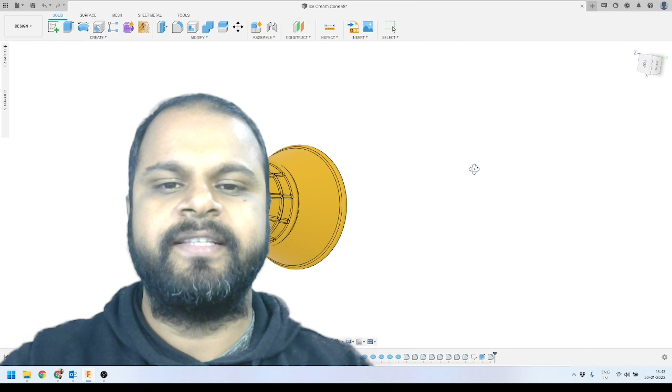In this video I'm going to explain how we can 3D model this ice cream cone. Right on your screen here you can see this is the ice cream cone that we are going to start modeling in this video.

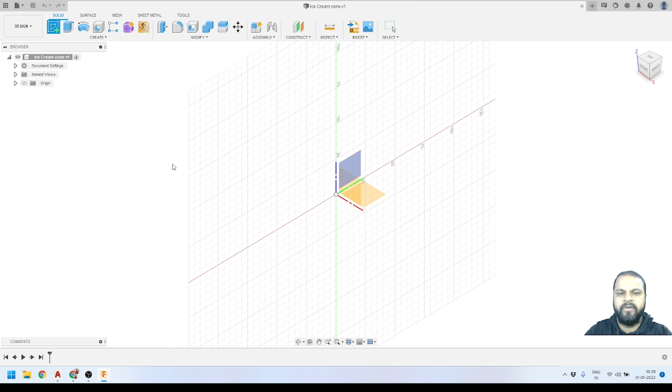We'll start with a sketch first. The first thing we'll do is click on this create a sketch tool from here, then select the front plane. My approach is going to be: I will create half of the cone, then revolve that by 360-degree angle. So this is going to be my approach.

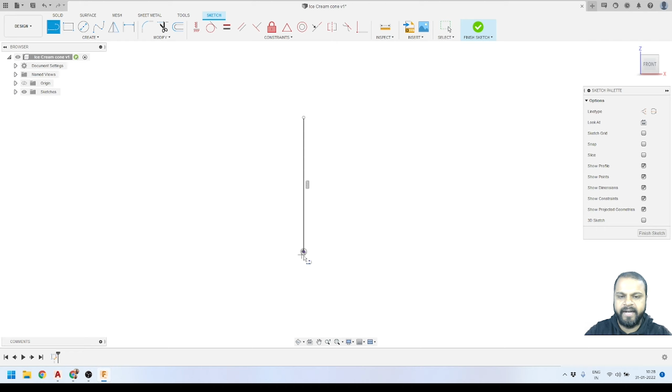I will first create a vertical line like this, and drag it like this. Next I will create a line like this, then another line like this, and this. So here I am simply creating lines and connecting those lines.

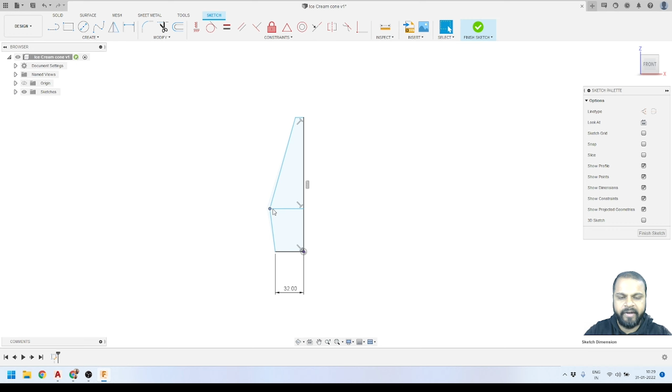The next thing I will do is put a few dimensions here. This one I want to keep at 32 millimeters, and I will drag it little towards inward. Then I will give a few more dimensions like this one, I want to keep this as 32 as well, and then from here to the top, I want to keep this as 95 millimeters.

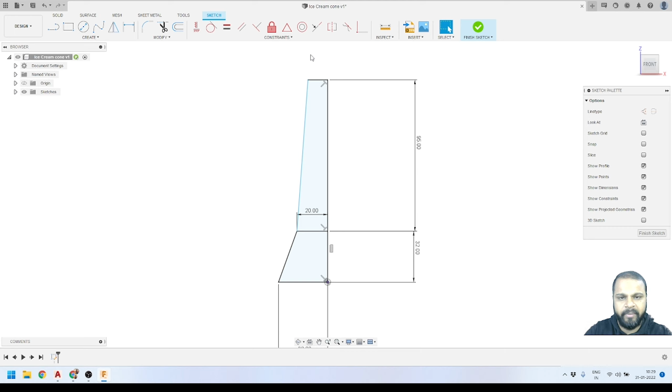This collar we want to keep at 40 millimeters, so I will write 20 millimeters since I'm taking the half of the 40 millimeters, and here we want to keep this one as 5 millimeters. We'll activate our dimension tool, select the line, drag it outside, and write 5 and enter.

Here you can see our half ice cream cone shape is done. I can click on finish sketch from here, and here we got our closed profile. These are the two closed profiles we got.

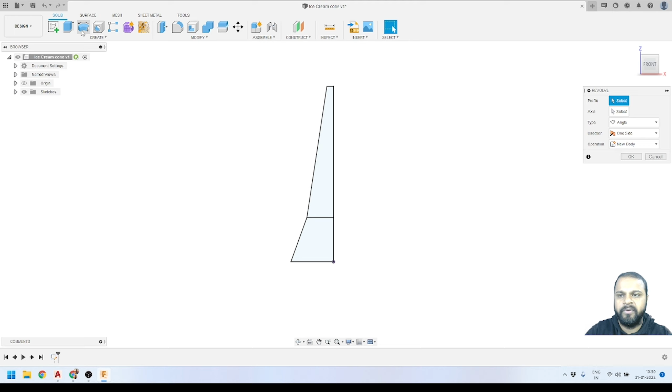I can use my revolve tool from here, select the profiles, and select the axis, and here we are getting the preview of our ice cream cone. The angle is 360-degrees, that's right, and I will just press OK.

One more thing I would like to tell you: when I started modeling this, I had not started with the component, and the reason is that this ice cream cone has just a single body, so there is no need to start with the component. You can simply start sketching this thing, because the component approach is only needed where we have multiple parts and we want to create assemblies with that. So in that case we need the component approach.

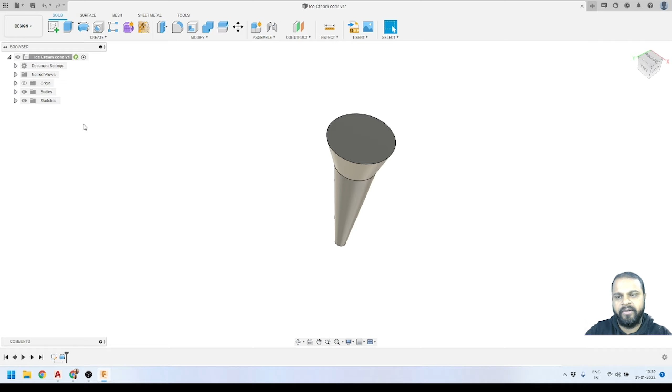Either you can go with the component approach or the single body approach that we are following right now, without using the component approach. So this is the ice cream shape we got, and the next thing is we are going to apply a few fillets on the bottom of this one. I will apply a fillet of 3 millimeters like this.

So we'll press OK. Here you can see this is what we got.

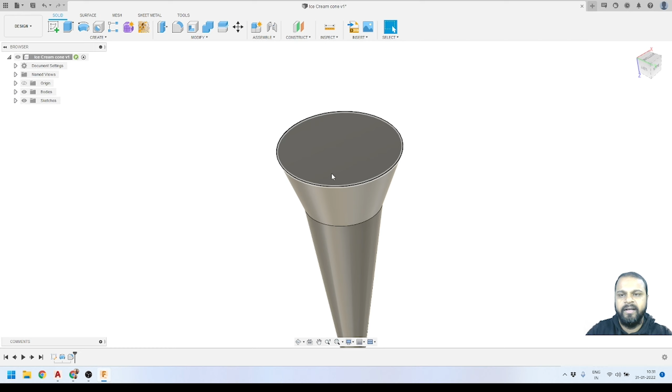Before moving forward, I'd like to apply a shell over here. I'll activate my shell tool, select this face, and provide a shell thickness of 2 millimeters, then press OK. Here's the preview we're getting, so it's looking like an ice cream cone, right? It looks like an ice cream cone, but we have to add lots more features to this.

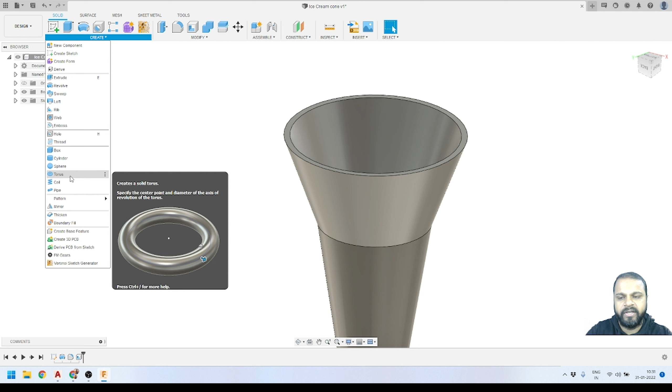To do that, we'll go to the create panel, then to the torus tool. We're going to create multiple toruses at different locations to make it look better. I'll activate the torus tool, select this front plane as a sketch plane, select the origin, and then specify the torus diameter.

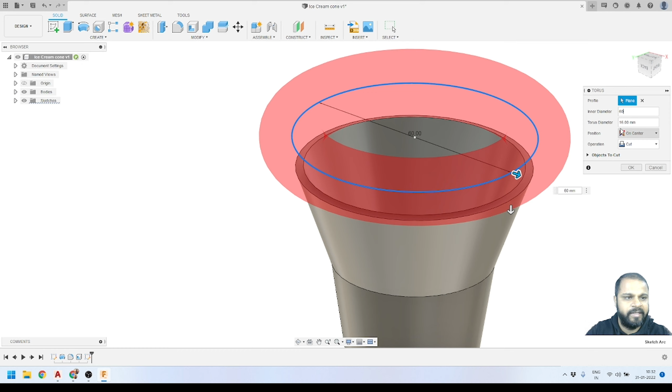This is the torus inner diameter, and I'll give it a diameter of 60 millimeters, and the torus diameter we want to keep is just 6 millimeters. We'll see in the back view how it's looking, and it looks something like this.

I think we have to increase this to 62 or something, and instead of cut I want to keep it as a join. Here you can see the preview we're getting.

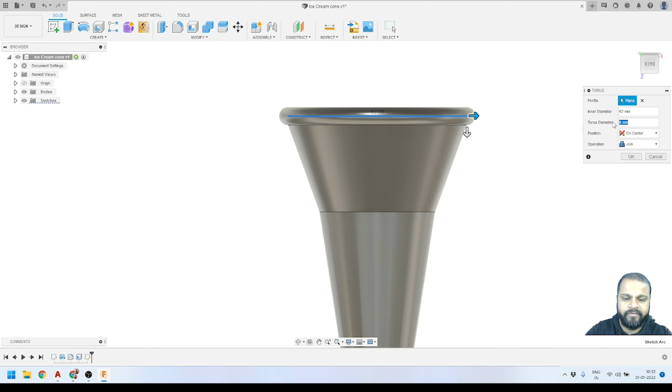I think the 6 is a little bit higher, so I'll decrease that to 5 and see how it looks now. This is how it's looking for now, and I think 62 will work, so we'll keep 62 and press OK.

Here you can see this is what we got. And if I expand the body, since I had kept the operation in the torus as join, it's still a single body since this part has been joined with the ice cream cone.

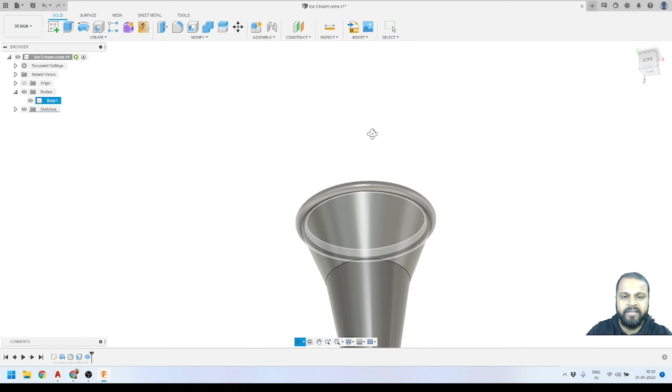The next torus we have to create is on this collar here. For that, first I have to create a plane at that location. If you remember the first sketch, the distance of this collar was 32 millimeters from the origin.

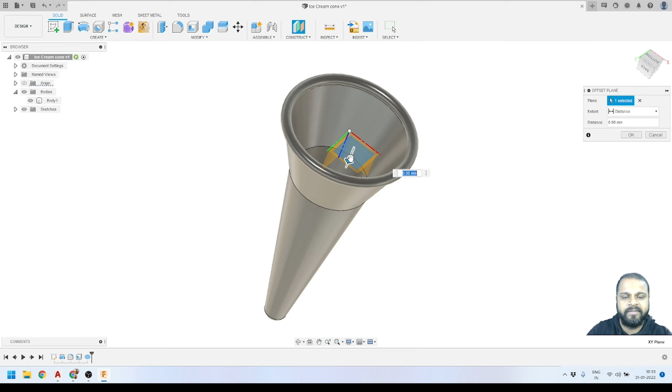I'll click finish the sketch here, then go to the plane tool, select the origin, this bottom plane, then go to the back view to see the location of the plane and write 32. Here you can see I'm getting a plane at this collar location, so I'll press OK, and here we got the plane.

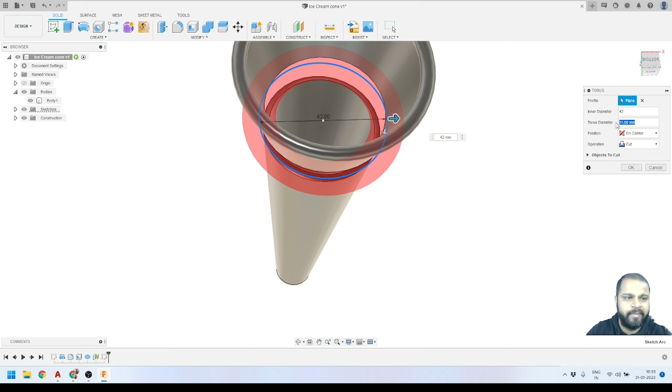Now I'll go to the create panel and repeat our torus tool. We'll select that plane, then the origin, drag it outside like this, and this time we want to keep this at 42 millimeters, and the torus diameter we want is 4 millimeters. I think that will be enough.

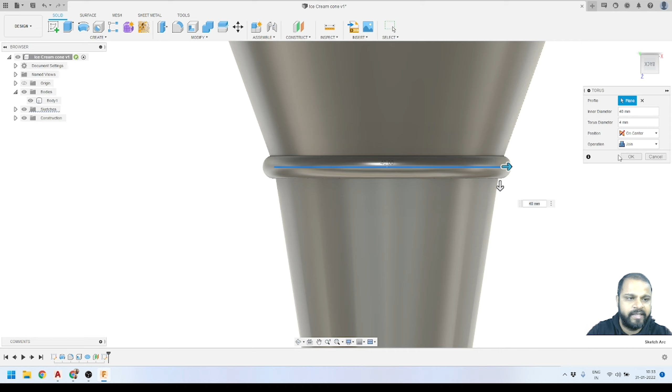We'll keep this as a join, and see the preview if we need to decrease the diameters. We had to decrease this inner diameter to 40. I think 40 will work, and we'll check inside if it's getting inside. No, it's not getting inside, so 40 is working in our case. The operation we're also going to keep as a join, so we'll press OK.

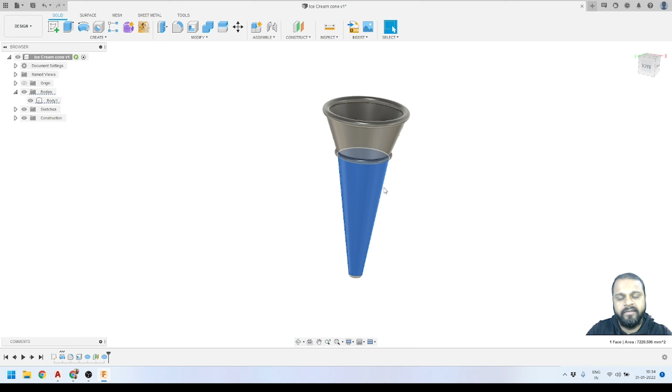You can see this is what we got. And the next thing is we have to create multiple toruses on this face. Before that, we want it to look like an ice cream cone with a patterned, textured face on this surface. This is what we're trying to achieve.

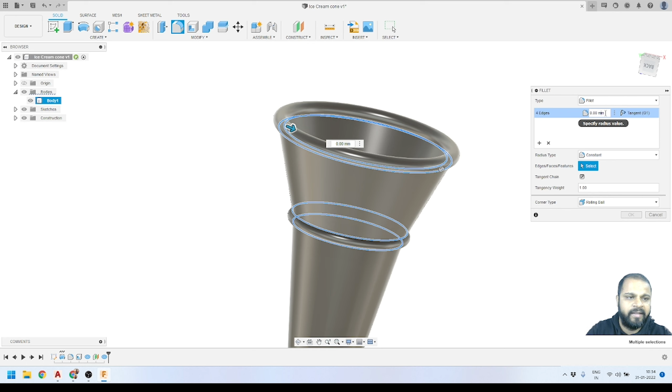For that, I'll apply a few fillets here before moving forward. We'll activate our fillet tool and select the edges where I want to apply the fillet. These are the corners where I want to apply my fillets - I selected all the corners, the inner corner, outer corner, and these two corners. Then I'll apply a fillet of 2 millimeters, or maybe 3 millimeters will work.

3 is good, I think that will give me a smooth kind of finish, and also make a good angle for 3D printing. It's nice, so I'll just press OK.

There you can see we had applied the fillet. Now we'll move forward to our next task.

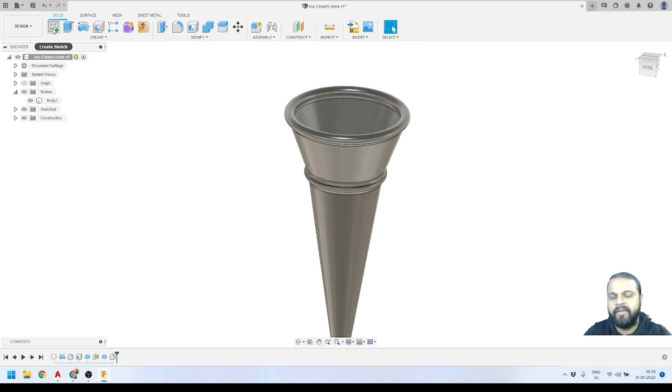We'll activate our create sketch tool from here, and select this front panel as the front plane for our sketch plane. So here we are, in the front plane now, and we'll start creating that texture on this face.

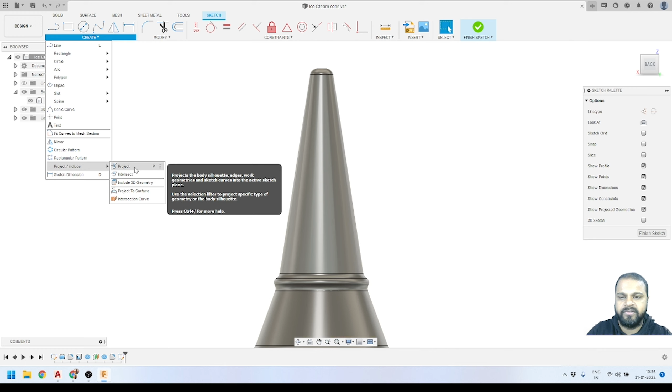We'll start by projecting the lines first. I'll activate the project tool from here, or use the shortcut key P. I had activated the project tool, and I'll select this line as a project line, and this line as a project line, and press OK.

You can see I got the end origin for both the lines. Next, we'll create a line like this from this point to this point. Then I'll click on finish sketch, and go on to the create panel, and this time I'm going to use the pipe tool.

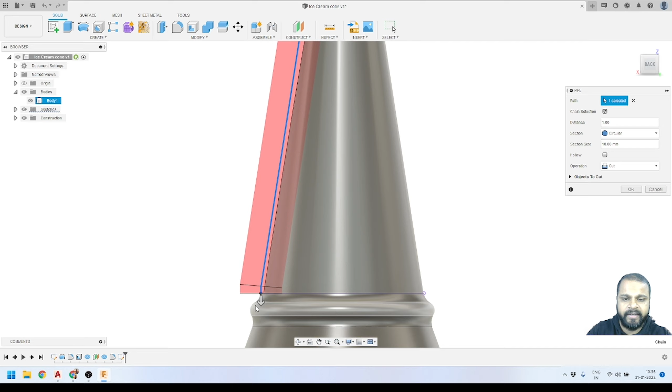We'll activate the pipe tool and select this one to create a pipe kind of shape. Here you can see we are getting a cut, but that is not needed. First I will specify the section size, keeping it at 1.6 millimeters, and here we want to keep it as a join.

Here you can see the preview we are getting. I will check on the top as well, to see if we are doing it right or wrong.

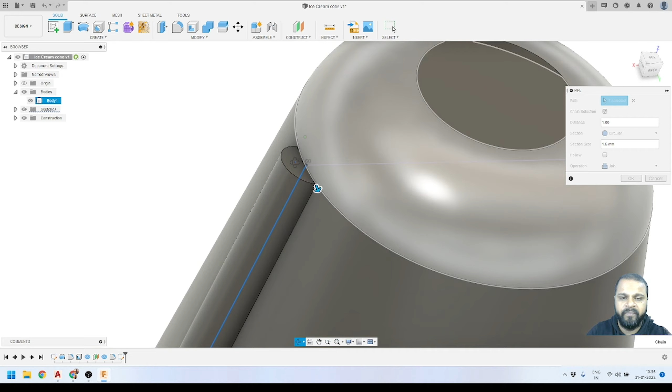Okay, so here's one more thing - I think we had to press Ctrl Z and go back to our sketch to modify it a little bit. We don't want to touch this line to the very end of this point; I just want to keep it a little bit earlier than that point. So I will select the line, press delete, and create a new line.

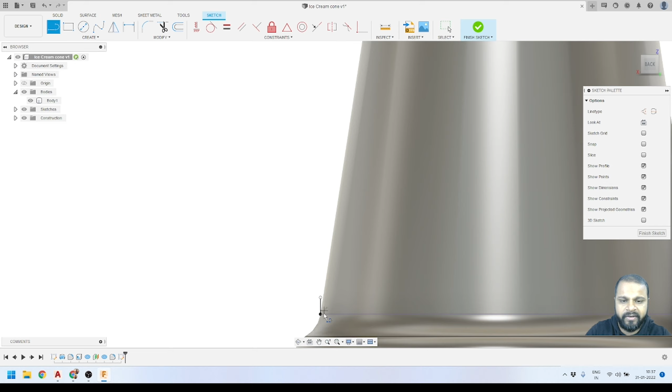This time I will not create a line touching the point. I will just create a line a little bit earlier to both points on both directions like this. Then I will create one more line like this connecting to this point, and on the other end I'll do the same.

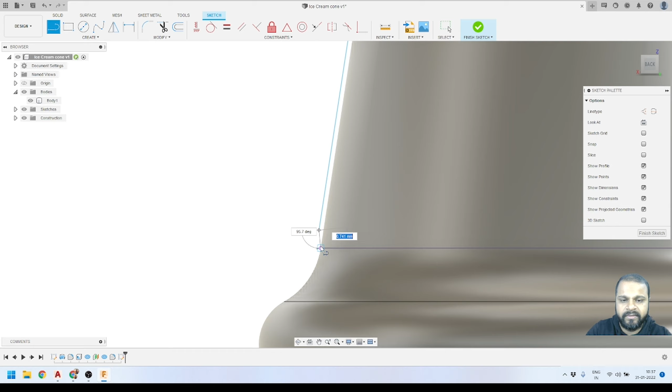I'll tell you why I'm doing this. I will make sure all three lines are in a collinear position, so I'll select the lines to make them collinear. Here you can see the lines are collinear now, and I'll also make sure these two lines are collinear - here they are, collinear now, and they are different lines.

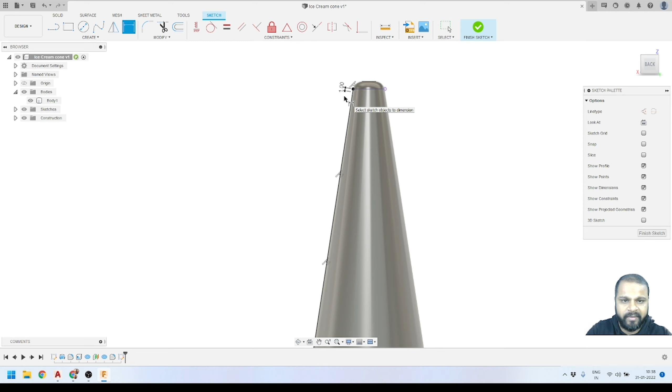So I will specify the dimensions. This small piece I want to be 1 millimeter, so I provided 1 millimeter, and I will select that particular piece and convert it to a construction line. I will do the same on the bottom face for the small piece - I also want to make this 1 millimeter and convert it to a construction line.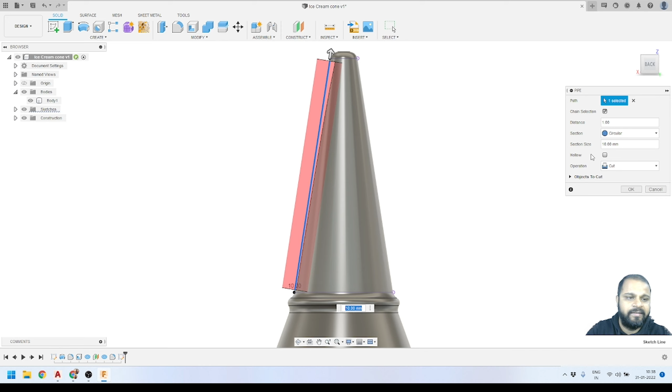Now I can click on finish sketch happily, and move on to our create tool, using the pipe tool again. We'll select the thing, provide the diameter of 1.6 millimeter, and make it a cut. Here you can see this is what we are getting, and we'll press OK.

Here you can see this is what we got. The only thing we have to apply now is fillets on these two edges over here - these are the two edges we want to apply fillets to. So I selected the two edges and will apply a fillet of 0.8 millimeter.

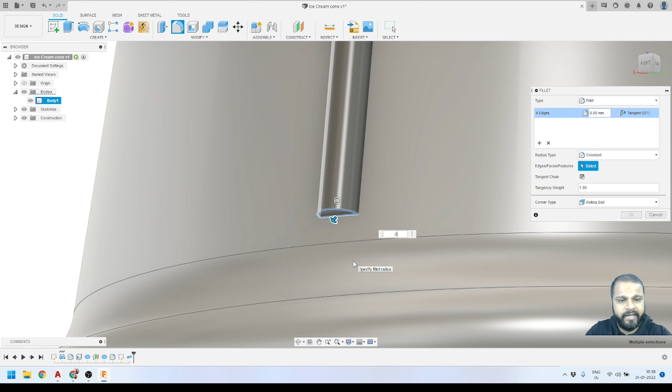I think that is going to work. If it's not working, we can decrease it to 0.7, 0.5, or 0.4. Nothing is working, so again we'll select only these two corners and apply the fillets. Sometimes things just won't work, but the 0.8 is working, so we'll leave it like this for now.

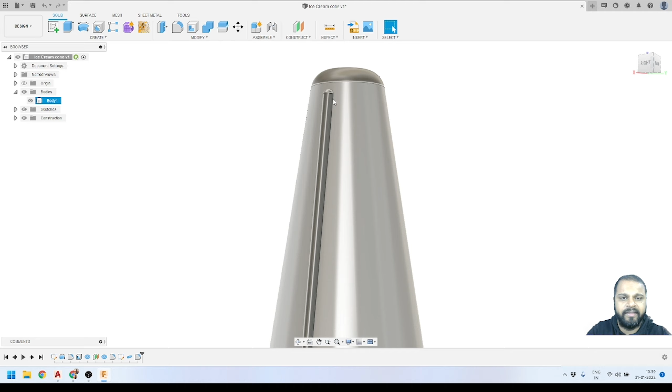Here you can see this is what we got, and I will select these two features from here by pressing shift on my keyboard, and then go to the create panel here.

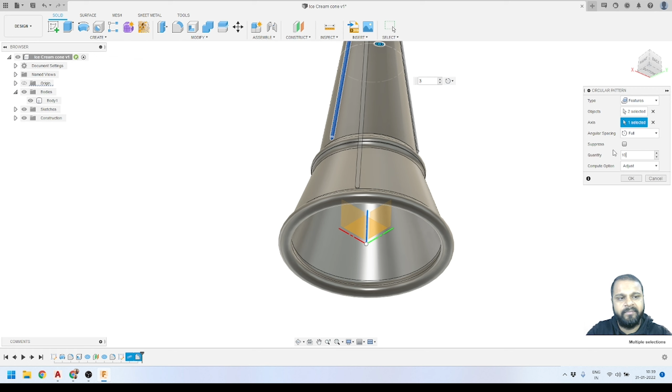Then I will go to the pattern and use this circular pattern tool, and I will select the axis - this blue axis, this vertical axis. I will provide the quantity as 10, so we want this patterned 10 times around the axis, and press OK. So you can see this is the shape we got.

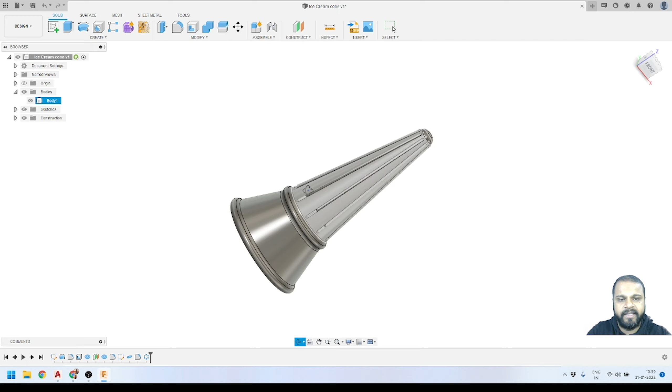I think it's looking good now. It's also not touching the end, which is very good, because if it touches we'll start getting lots of issues. So that's very nice. Next we have to start making toruses on vertical positions to make a rectangular kind of pattern on all these faces.

There will be lots of repetitive tasks, so we'll move this video a little faster to give you an overview. We'll first start with creating a plane. I'll activate the tool, turn on my plane, select the plane, and offset it towards the vertical position by 10 millimeters like this. Then I will repeat the process, selecting the plane and giving it an offset of 10 millimeters, keeping lots of planes like this.

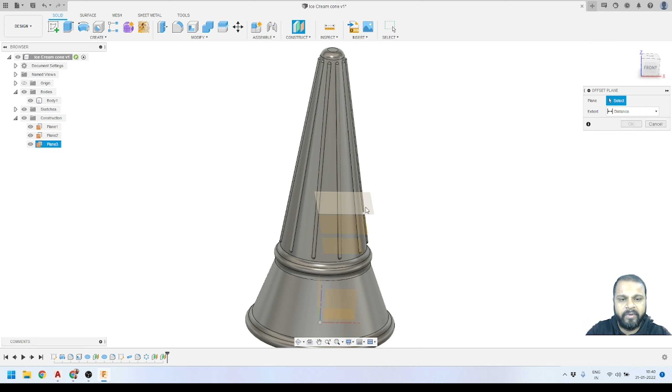Here you can see we had created multiple planes - maybe 9 or 10 planes.

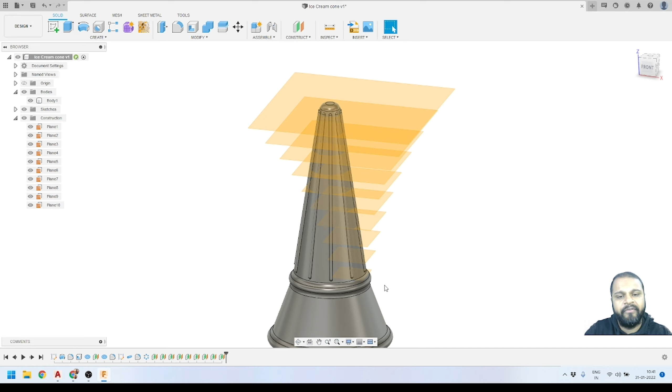Now we are going to create multiple toruses on different planes. Right now you can see that on this plane there is already a torus created. We'll start getting toruses from this plane, so before that I will activate my torus tool, go to the create panel, select the plane, select the origin, and drag it like this to specify the torus diameter.

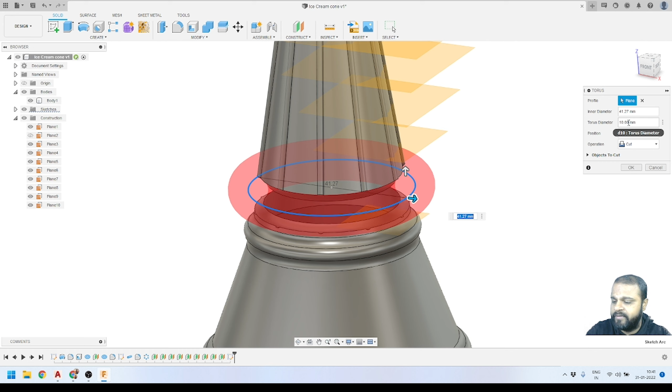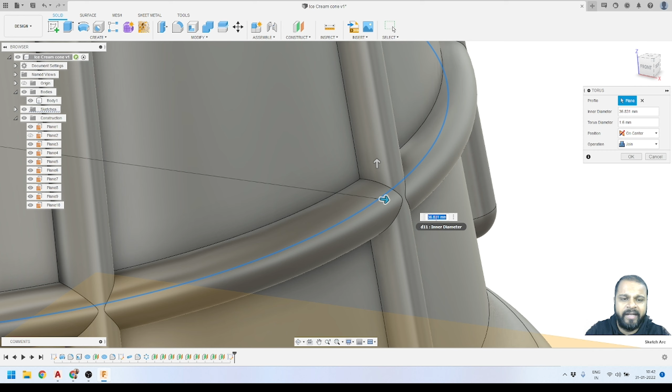Every torus we want to keep as 1.6 millimeters, so I'll write 1.6 and drag it inward like this, making sure the operation is kept as join, and keep dragging inside. I just have to drag up to the point where this pipe just overlaps the torus - this is the right position. We just have to make it approximately, no need to be very accurate. I will press OK to accept the torus at this position.

We'll repeat the same on different planes as well, because there is no other way to create these toruses - we cannot use the rectangular pattern tool or anything like that, because that is not going to work. So we'll keep repeating this process on different planes.

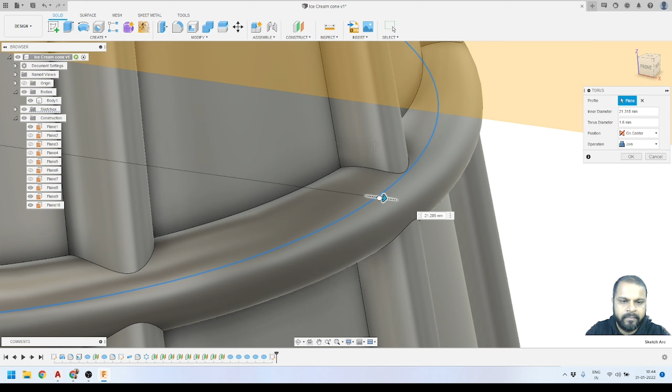Here you can see we had just finished making all the toruses, and the pattern looks very nice on this surface. Now it has started looking like an ice cream cone, and we'll turn off these planes also. The only thing left now is to apply a few more fillets on all these sharp edges.

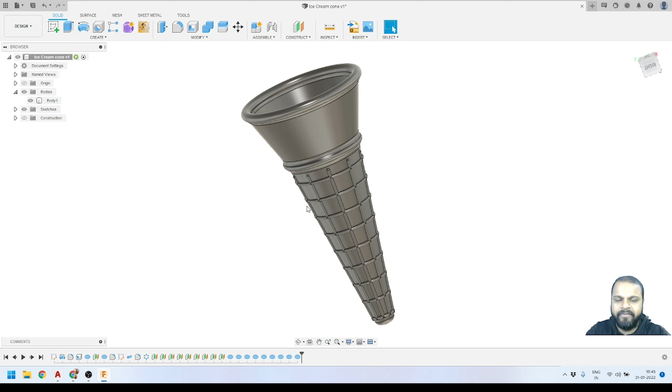Here you can see on these edges. We can do this simply by using our selection tool. I can go to the front view like this, go to the selection tool from here, and we have to make a small change. We'll go to the selection filter, deselect everything, and take only the body edges, making sure that 'select through' is ticked on.

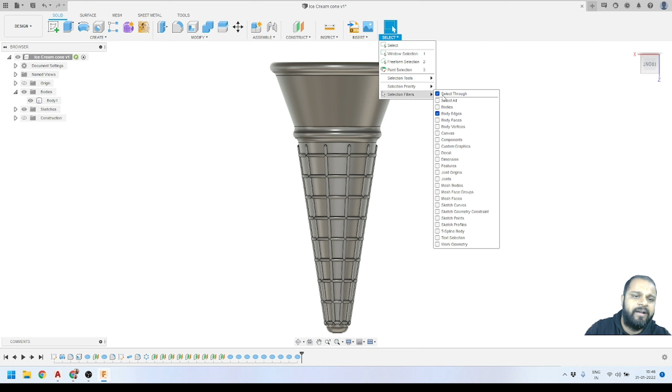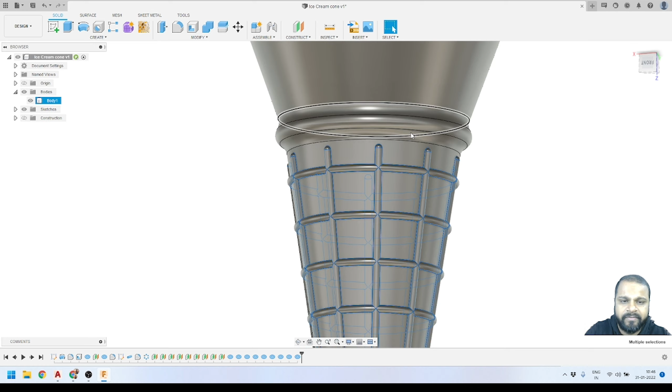I will come back to my model and drag it like this to select all the edges. Here you can see I had selected all the edges only of our model, because we activated our tool. I can deselect the edges we don't need by pressing shift on my keyboard - we had selected somehow extra, so I'll just deselect these two edges we don't need.

Now I can activate my fillet tool from here, and I will give it a fillet of 0.6 millimeter. We'll wait to accept that fillet to our model, because there are lots of edges, so it is going to take a little bit more time. Here you can see now we are getting the preview.

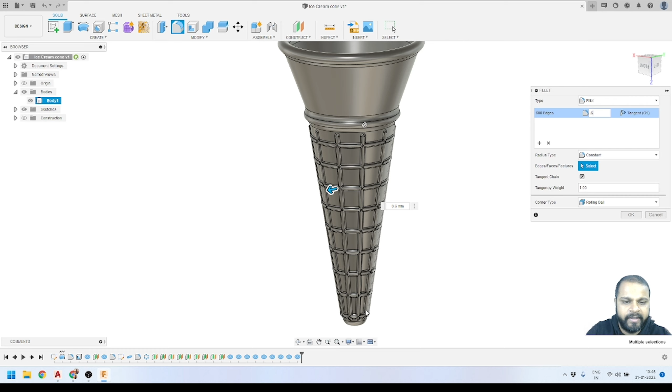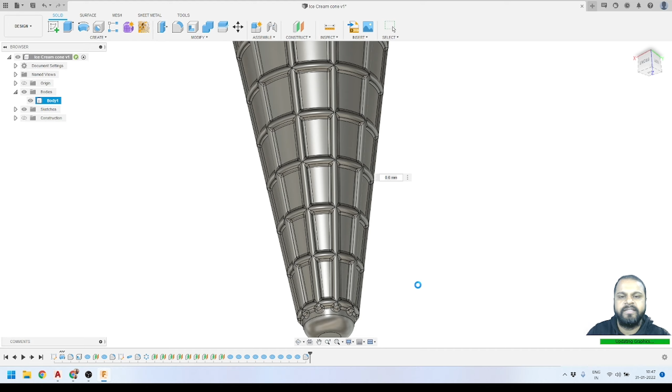It's working, and it has accepted all the fillets we applied, so we can just press OK. It takes a little time to process because Fusion 360 is completely a cloud-based tool, so it needs some internet and processing to finish up the model. Now we are ready with our finished model of the ice cream cone, done in Autodesk Fusion 360.

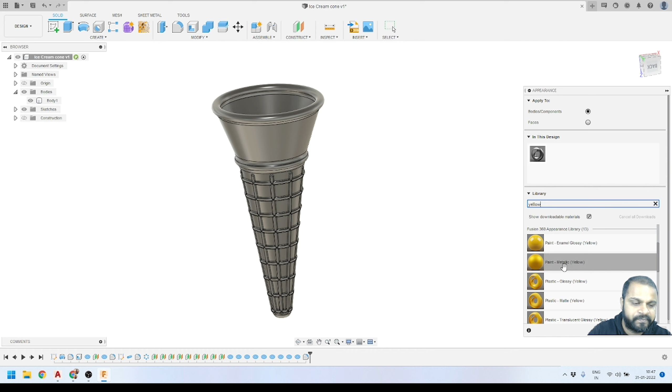Now I can apply some good looking material from the appearance tool. I'll search yellow since we're applying yellow, and this time I'll use metallic paint. I'll drag and apply it, then double click to give it a little orange shade by adjusting the color, making sure we get the right shade to make it look more realistic.

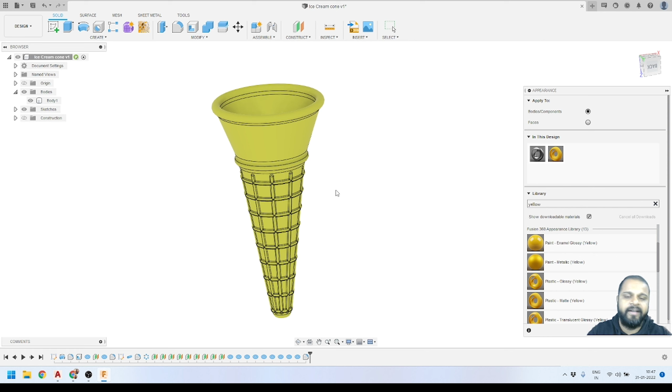I'll close the appearance tool, and here we have our ice cream cone designed and modeled in Autodesk Fusion 360. But the only problem is this model is not ready for 3D printing. To make it ready, we have to make a small change.

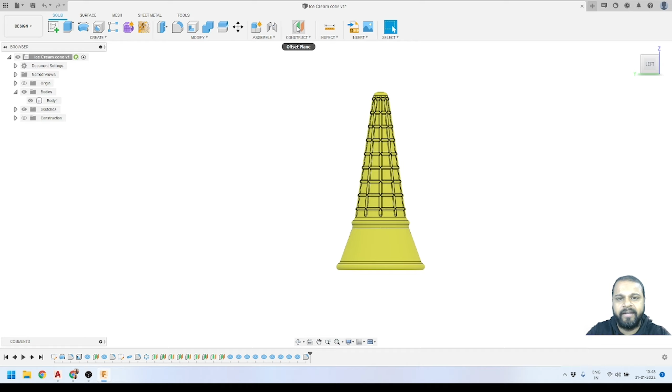We'll go to the left view, activate the offset plane, select this bottom plane, go back to the left view, and drag it downward maybe by -1 or -2 millimeters, then press OK. We've just created a new plane. To see it, we turn on construction from here, and here you can see this is our new plane.

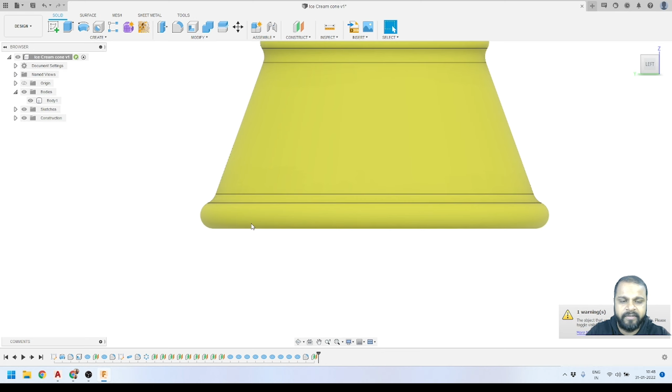Now we go to the modify tool, select split body, select this body to split, and use the new plane as the splitting tool. We've split it, so we press OK and turn off the extra body. Now you can see we got the flat base.

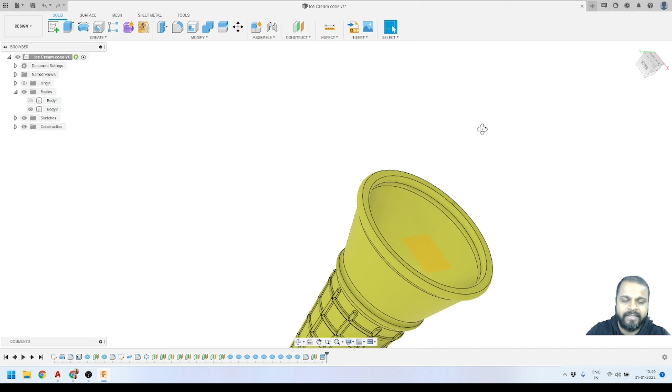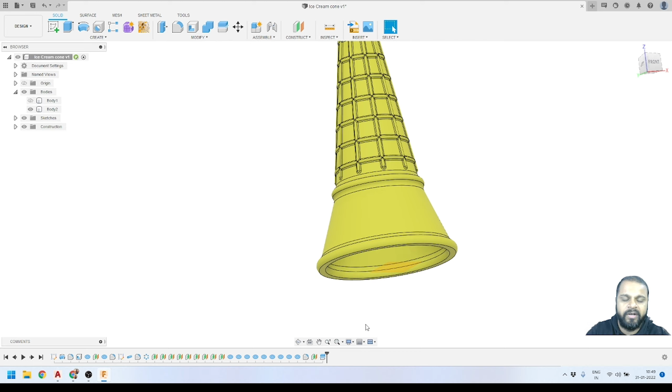If we 3D print this complete body in this orientation, we now have the flat base needed to print it. Since this is for a particular project, we're going to put a bulb on this side, and the wires will go through the cone and come out from this face, so we also need to make a hole on this face.

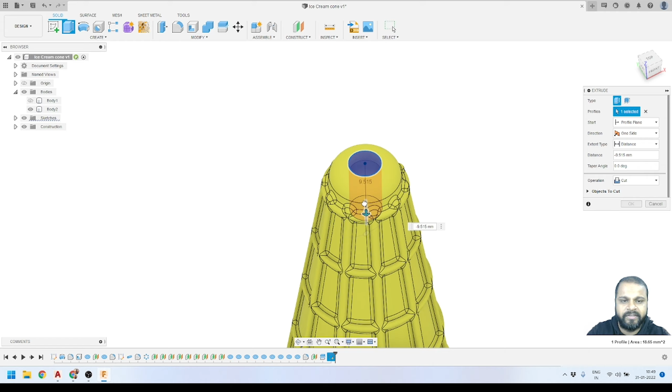I'll activate the sketch tool, select this face as the sketch plane, and create a hole like this so the wires can come out. I'll click finish, then use the extrude tool, dragging it downward to make a through cut, and press OK. Now you can see we got the cut as well.

So this cone is now complete and ready for 3D printing. I can rename this body as 'ice cream cone' for this project and press enter. Anytime you want this body exported as an STL file for 3D printing, just right click, select save mesh, change the format to STL binary, and press OK to save the file at your location for 3D printing or any other purpose.